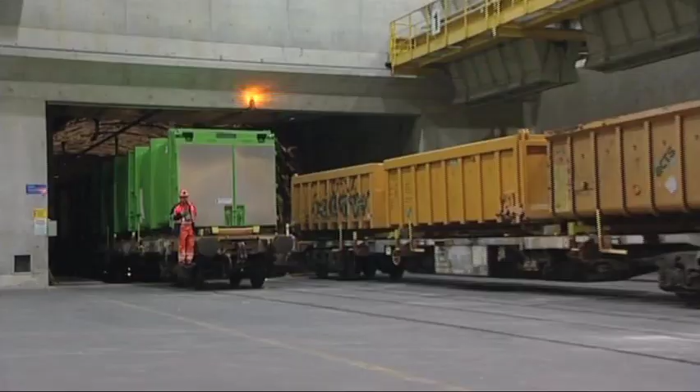Tridel is connected to the Swiss railway system. In Lausanne, the convoy enters a 4-kilometre-long tunnel that ends in the centre of the waste treatment plant. This tunnel runs unnoticed under the city, offering rapid access to the plant without disturbing the population. On average, 5 trains with 4 wagons use this railway line every day.

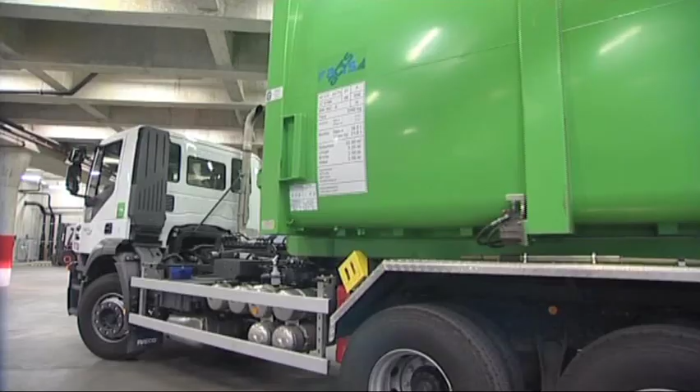For environmental reasons and for the integration of the plant into the urban site, the building is 2/3 underground. The train station is on the lowest level of the plant. To take the garbage to the storage pit, skips have to climb a 15-metre ramp, the equivalent of a 5-storey building.

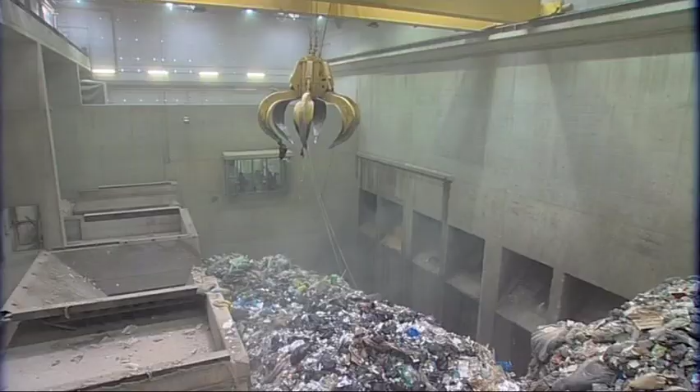After having been weighed, the garbage is poured into a huge 10,000 cubic metre concrete pit for storage, whose walls are 60 centimetres thick and 30 metres high. Here the quantity of 2 weeks of waste collection can be stored in case of a factory shutdown. The ovens are usually working 24 hours a day.

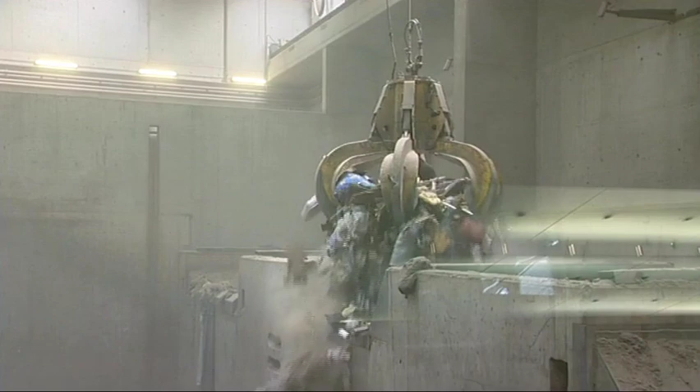In this control room, the operator works. He feeds the ovens. At the same time, he is responsible for crushing the bulk waste and mixing it with the rest of the garbage.

Like a giant spider, this grapnel, steered by the operator, carries 2.4 tons of waste with each grip. That's more than 200 waste bags at one go. The garbage is poured into a hopper, a sort of funnel that takes the waste to one of the 2 ovens.

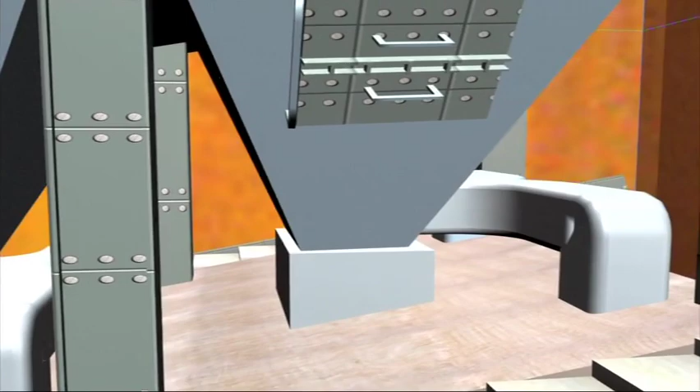Welcome to the furnace. Here it gets very hot. The maximum temperature in the combustion chamber reaches around 1100 degrees centigrade. Most of the waste burns instantaneously without additional fuel. This temperature is necessary for the destruction of the greater part of the waste. To reach such a temperature, the fire is stoked by a supply of forced air under the combustion grate. Thanks to the reciprocating movements of the grate, the burning waste reaches the exit of the oven.

This enormous heat is recovered in the boiler, lined with 42 kilometers of water-filled pipes. The high-pressure steam produced is used for urban heating and the production of electricity. At the exit of the boiler, so much energy has been recovered that the temperature of the flue gas has dropped from 1100 degrees to less than 200 degrees.

Now the flue gas produced by the waste incineration has to be purified. First step is the electrostatic precipitator. By using a process of magnetic fields and static electricity, the largest dust particles are attracted onto metallic plates more than 10 meters high. These plates are regularly beaten with hammers to dislodge the dust, which is collected for later treatment.

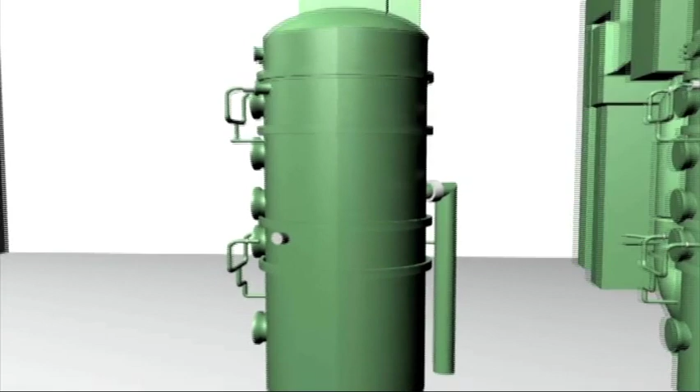Second step, the wet scrubber eliminates the finest particles. To start with, the flue gas passes through a curtain of water before reaching the wash tower. Here the flue gas passes through different floors to capture acid gases, heavy metals and sulfur oxides. Finally, a mixture of water and soda neutralizes the flue gas chemically.

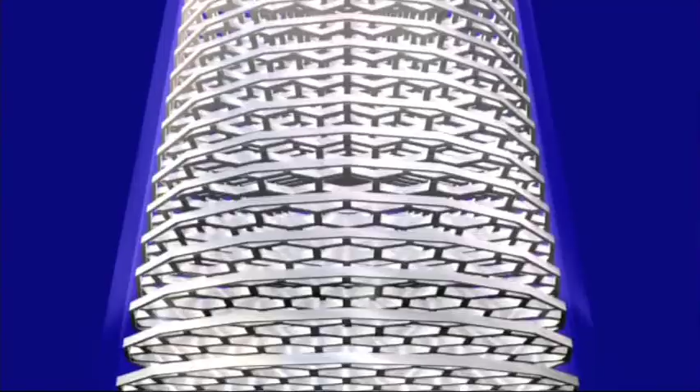Last step. Flue gas passes through a catalyzer which destructs nitrogen oxides, identically to the catalyzer in cars. High toxic dioxins are also destructed here. Today, this flue gas treatment installation is the essential element of the plant, using the most modern technologies. Sucked by a powerful fan, the purified flue gas is finally released into the atmosphere via an 80-meter chimney.

Thanks to these innovative processes and to continuous controls, Tridel shows excellent results, 90% below the legal norms for air protection.

Another essential element is the double use of the thermal energy recovered during incineration. The water heated in the 42 kilometers of boiler pipes is transformed into steam at 50 atmospheres pressure. This high-pressure steam drives a turbine linked to a 20 megawatt generator.

The recovered steam is also used for the urban heating system of the city of Lausanne. Through this combination of the production of distance heating and electricity, the Tridel plant has one of the highest degrees of efficiency in Switzerland, with more than 50% of recovered energy.

It has the capacity to produce heat and light for 18,000 people, the equivalent of a town like Vevey or Nyon. In winter, Tridel provides energy mostly for the urban heating system. In summer, the factory produces more electricity.

Consider this the next time you switch on a light or use the radiator to dry your towels. The necessary energy might come from the combustion of your waste bags. Waste transformed into energy. And so we've come full circle.